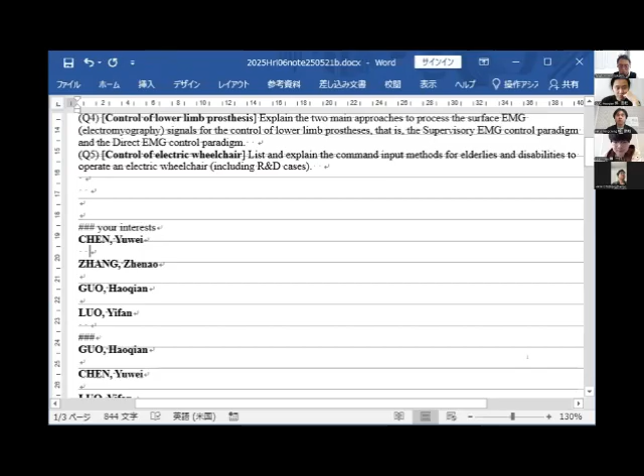Not only limited to these questions, but to which part of today's contents you are interested in - I want to hear from you first. So please answer which part of today's content or topic you are interested in.

I'm interested in learning - I'm interested in the lower limb prosthesis.

Why are you interested in this? Because it can help disabled people to activate their limb.

More details - which part are you interested in for the lower limb system: the mechanical part, the control part, the actuator part, or the sensing part? The direct EMG control.

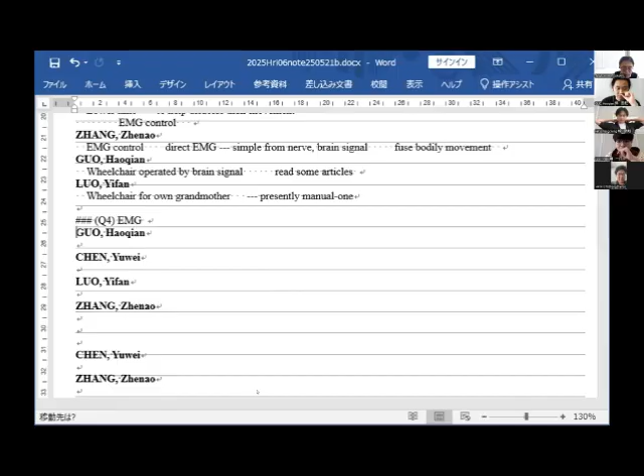Let me share my work. If it could be seen — because the computer doesn't have power, I have to use my cell phone to share instead. Here's question four.

Firstly, the supervisory EMG control. This is just like we need a kind of signal that makes a start or stop, and the control of the prosthetics as a kind of robotics system could work by itself. So this is called supervisory — it doesn't mean you need to control the actual exact movement itself. Your nerve signal is just there to give a signal that says start or stop.

A basic example is the autogenous bionic prosthetic knee. Its advantages are that it reduces user cognition and muscular workload, enables stable and safe gait in structured environments, and is well suited for users with limited residual muscle control. It's fairly useful for people who don't have the ability to export nerve information.

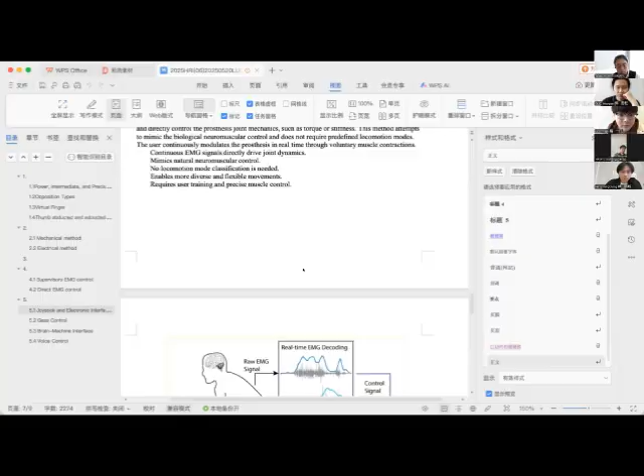The features of this control mode are: continuous EMG signals directly drive joint dynamics, mimicking natural neuromuscular control. No locomotion mode classification is needed, enabling more diverse and flexible movements, and it requires user training and precise muscle control.

So yeah, I don't know.

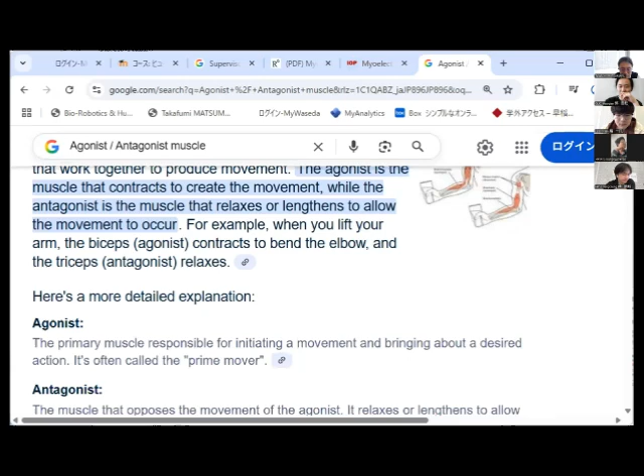How do you think? Do you know what we should say at the beginning to explain about this kind of agonist muscle, antagonist muscle? Agonist muscles, um, I think we should start from the human body structure because it is the muscle of the human, and what's the word?

Maybe I think this word maybe comes from anatomical. So maybe we can firstly start from some knowledge of the anatomical. I think it may be a good idea.

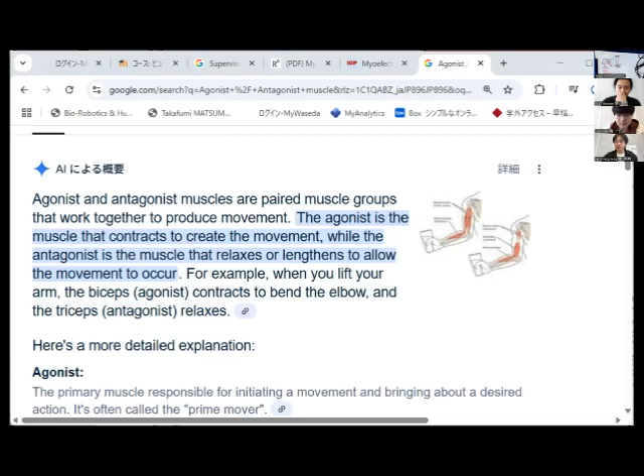Explain two main approaches to process the surface EMG signals for the control of lower limb prosthesis. Supervisory EMG control paradigm: in supervisory EMG control, EMG signals and gait events are used to classify the user's locomotion mode. The classifier's decision determines transition between the predefined finite states, and thus the specific low-level control of prosthesis operation associated with the identified locomotion mode.

The direct EMG control paradigm: in direct EMG control, the magnitude of EMG signals recorded from residual muscles directly and continuously modulates the prosthesis joint dynamics. Various control laws can be used to continuously map EMG activity to ankle control torque to drive prosthesis dynamics.

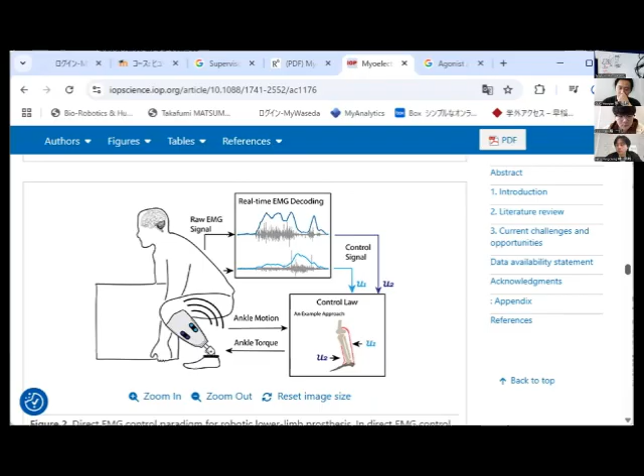Fine, thank you for your question. And...

Do you have more questions about the EMG signal control? Your part is your interest. He wants to know your question or your concerns or interest about the EMG control. Do you want to explain more? What is your intention, or do you want to talk more or not? No, I think that's enough. That's enough? Yeah.

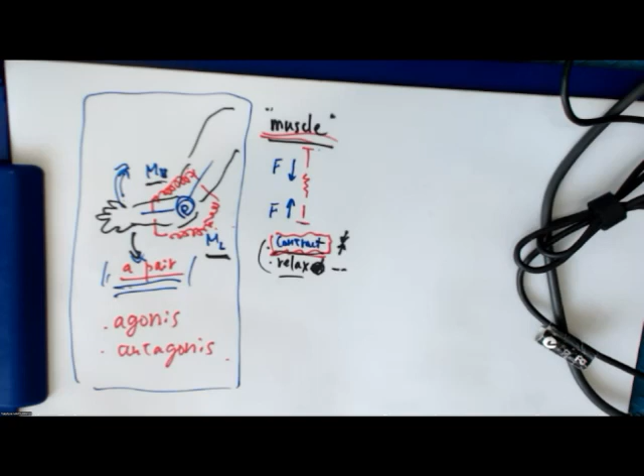When you have a long history of bad knees like me, jumping off a ledge with a 50-pound weight on your back is a surefire recipe for months of PT and crutches. But when you're wearing a military-grade robotic knee brace, theoretically, you should be okay. Moment of truth, I'm very nervous. I know. I'm Brent Rose, and I'm about to pay for my orthopedist's Hawaiian vacation. 3, 2, 1. Oh yeah baby, all day! Sweet. You're not going anywhere, Dr. Shapiro. Let's jump off a roof.

So you've heard about augmented reality, right? Well, how about augmented mobility? Robotic exoskeletons have captivated us for years. They're major tropes in sci-fi movies like Aliens, Elysium, and Avatar, but in real life, engineers have been working on them since the early 1900s, generally with terrible, clunky results.

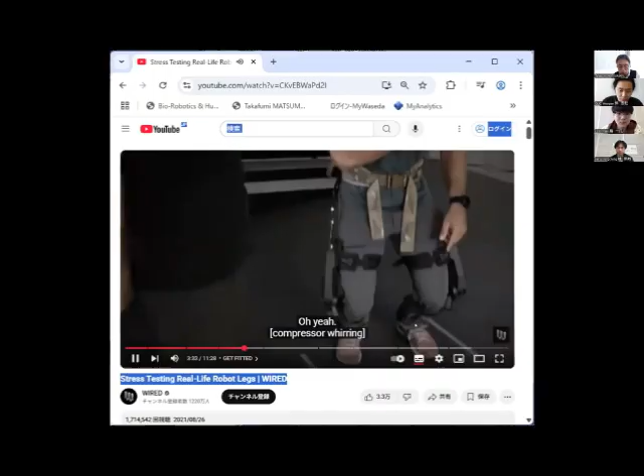Oh, yeah. Yeah, it's very springy. I couldn't help but notice that anytime I move, there's a bit of a noise coming out of it. What is that we're hearing? Yeah, so what you're hearing right now is the compressor itself charging up air to supply to each of the braces themselves. Part of what you're also hearing is when you move, there's the filling portion for the actuator, and then as you come back up, you'll hear venting. So some of that is both the brace sound and the power pack sound. Something we're working towards reducing, but that's what you're hearing, and that's what some of the vibrations are that you're feeling.

Okay, so we're going to start with a control test, and to do that we're going to do some squatting, which I haven't done in like 20 years. Normally you want to do this to failure. Failure for me, since I have a freshly tweaked knee, is going to be any inkling of pain, or just me passing out with a dumbbell on my head. All right, so this is 185. Let's see how this goes.

How red is my face right now? Whoa! Yep, we'll call it good. 4 is good.

Now I've got the forge on. We're going to turn it up to max support mode and see what we can do here. All right, it's okay to be scared. Here we go.

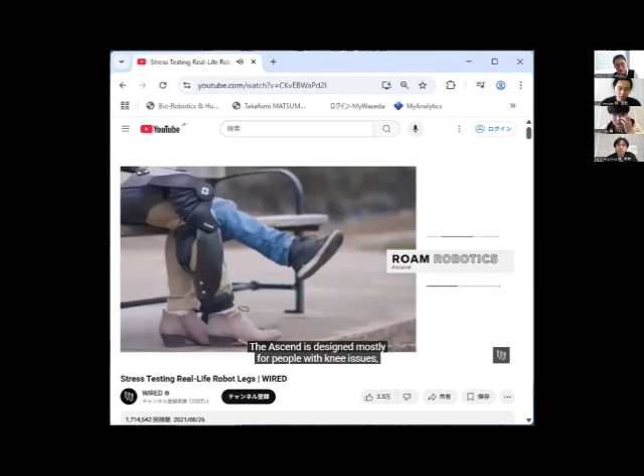It's worth noting that while we're just testing the Forge today, which is designed for these high-impact activities, Roam has two other models: the Ascend and the Elevate. The Ascend is designed mostly for people with knee issues, helping with standing, sitting, and going up and down stairs.

The Elevate is made for skiers whose knees aren't what they used to be. I actually got to test it in Big Sky, Montana a couple winters ago, and it did help me power through turns with less strain on my knees, though the sound of the air compressor in an otherwise tranquil place was pretty hard to ignore.

So the Forge did pretty well in the lab in some controlled testing. Let's try a little less controlled testing. They told me specifically that it will not help me dunk a basketball. We're gonna prove them wrong.

Perfect. All right, I'm all forged up now. Let's see if this improves my vertical at all.

No. Come on, baby, I cannot fly. I was wrong to believe that I could fly, and I feel stupid now. Okay, fine, so it was not designed for dunking.

Let's try a few things that it was designed for.

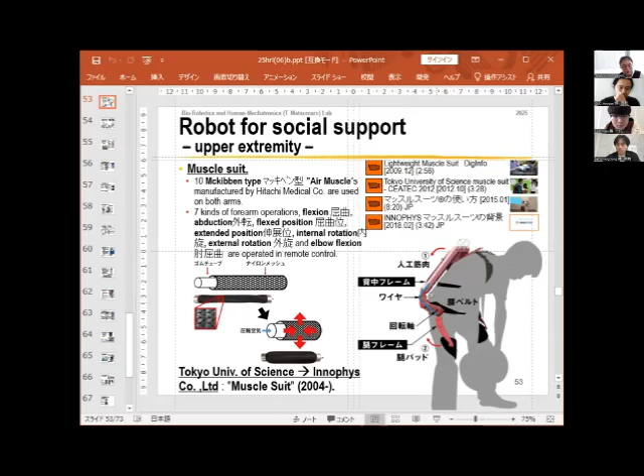Yes, good. Do you have some questions or do you want to discuss more about this part?

Well, we are hearing the question about EMG signal and control, and then we talked about it.

Yes, this is a main interesting paper, and this is one interesting video that we watched to see more practical usage of this.

Yes, this kind of knee supporting system - we don't know which kind of sensor is used.

Sometimes an EMG signal is used, sometimes it's only an acceleration sensor or some other sensor used to detect the situation or the user's intention.

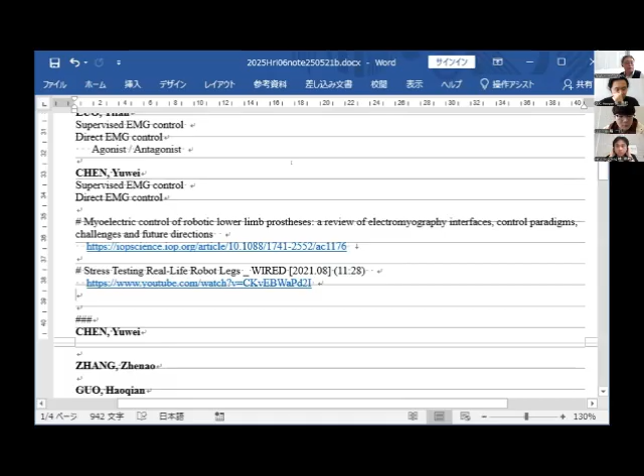So therefore, I have shown this video.

So, do you have any questions or comments? Or do we want to watch more or discuss more about this section?

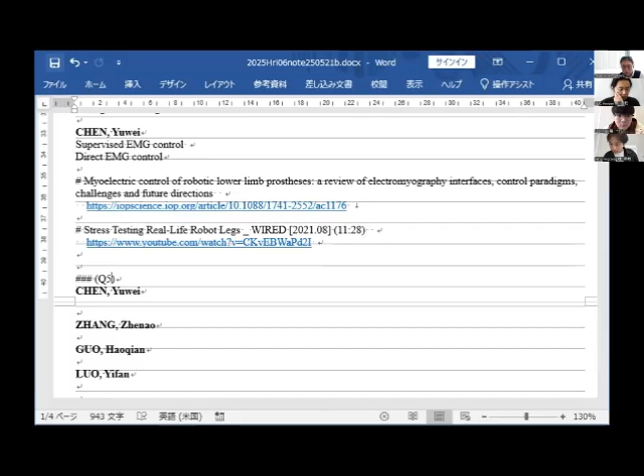Okay, this is my answer to question 5. This explains the common input methods for elderly and disabled users to operate an electric wheelchair.

The first is joystick control. It is the most prevalent method, where users manipulate a joystick to control direction and speed.

Firstly, the joystick translates physical movement into electric signals, and these signals are processed by a microcontroller, which interprets the input and sends commands to the wheelchair's motor controls.

And thirdly, advanced systems may include adaptive logic, algorithms that adjust sensitivity based on user strength and dexterity.

And the secondary method is the brain-computer interface.

It can be briefly called BCI. BCIs enable users to control wheelchairs using brain signals, benefiting those with severe motor impairments. First, electroencephalography captures brain activity, and then signal processing involves filtering, feature extraction, and classification algorithms to interpret users' intentions. Second, the commands are then relayed to the wheelchair's control system.

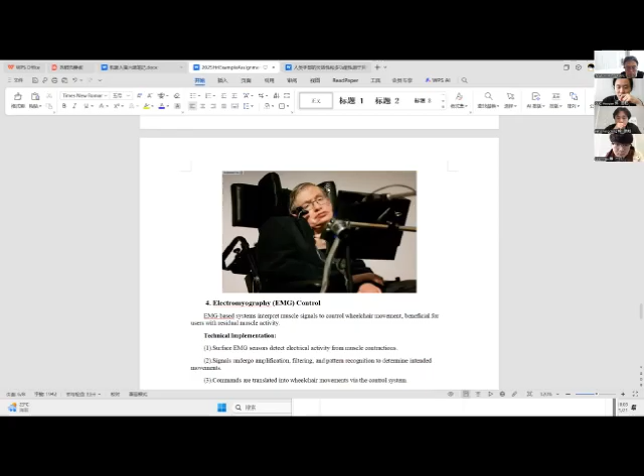Finally, there is electromyography control, briefly called EMG. EMG-based systems interpret muscle signals to control wheelchair movement, beneficial for users with residual muscle activity. First, surface EMG sensors detect electrical activity from muscle contractions, and then the signals undergo amplification, filtering, and pattern recognition to determine intended movement. Finally, the commands are translated into wheelchair movement by the control system, and so on.

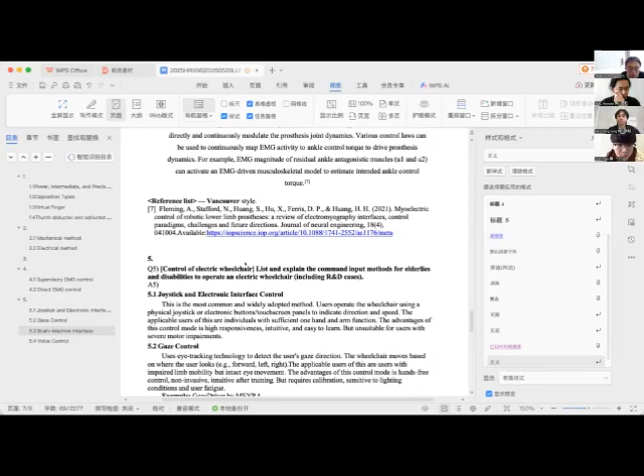First is the joystick and electronic interface control. This is the most common and widely adopted method. Users operate the wheelchair using a physical joystick or electronic buttons to indicate direction and speed. The applicable users are individuals with sufficient one-hand and arm function. The advantage of this control mode is high responsiveness, intuitiveness, and ease of learning, but it's unsuitable for users with severe motor impairment.

Second is gaze control. They use eye tracking technology to detect the user's gaze direction, and the wheelchair moves based on where the user looks. The advantage of this control mode is hands-free control and non-invasiveness, intuitive after training, but it requires calibration and is sensitive to lighting conditions and user fatigue. An example is GazeDriver by MEYRA.

Next is brain-machine interface control. Brain signals, typically using EEG, are decoded and used to control the wheelchair. This allows the user to operate the device by thought alone. The advantages of this control mode are no physical movement needed and high accessibility for severely disabled users, but it is still largely untested, requires a long training period, is costly, and prone to noise.

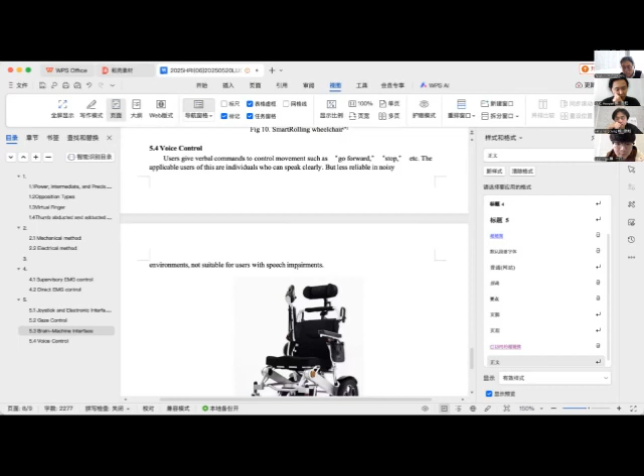In my opinion, unless a user has severely limited mobility, wheelchairs controlled by gaze, brain-machine interface, or voice may actually pose unnecessary risks for elderly individuals. For example, my grandmother cannot walk long distances, so she used to rely on a manual wheelchair, pushing herself daily to meet friends and play mahjong. Seeing that it was slow and physically exhausting, I bought her an electric wheelchair with joystick and button controls. However, after trying it once, she was frightened, felt she couldn't operate it properly, and was afraid of crashing or falling. As a result, she went back to using her manual wheelchair.

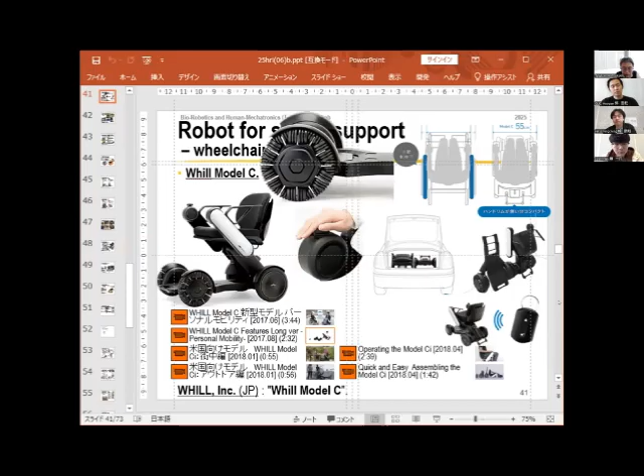What you haven't said is maybe - in this material I have also provided some examples, like gaze eye movement control, which was also tested more than 10 years ago, and many other researchers try to do gaze control, and also BMI control, brainwave control, made by various kinds.

I recently mentioned gaze because autonomous driving makes gaze control different and new these days. It means that we didn't use the gaze to input how we move - we just use the gaze to input the location that we need to move to. So this is the most interesting thing, that nowadays gaze has become a topic again.

You have some opinion? Okay, now, gaze control.

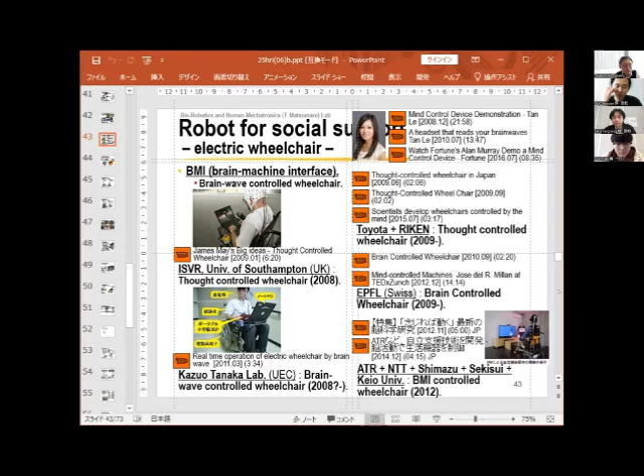When we say gaze control, there's tentative direction control - the gaze direction shows forward, right, and left, we can decide. But of course, gaze's meaning could also be a goal point - pointing to the goal is also one way. So this is definitely a way toward nowadays gaze control. This is very interesting, that the most traditional method is becoming a definitely new one.

Okay, good. And also this is brain - a brain signal control. And the product presently produced by a US company, I will show some video.

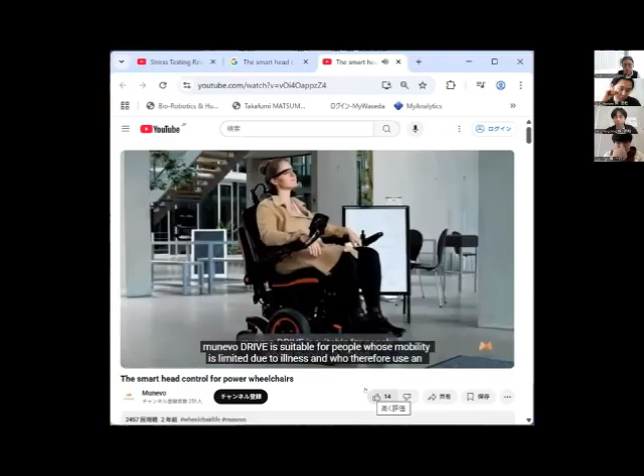In addition to controlling wheelchairs, drivers can use smartphones and apps to take photos and much more. munevo DRIVE is suitable for people whose mobility is limited due to illness and who therefore use an electric wheelchair. To use munevo DRIVE, you must be able to nod and tilt your head within a range of about 1.5 inches in each direction only.

Our technology allows people to continue to control their wheelchairs safely and intuitively, even with minimal head movements, for more freedom and mobility in everyday life. munevo DRIVE has been approved as a medical device since 2018 in Germany.

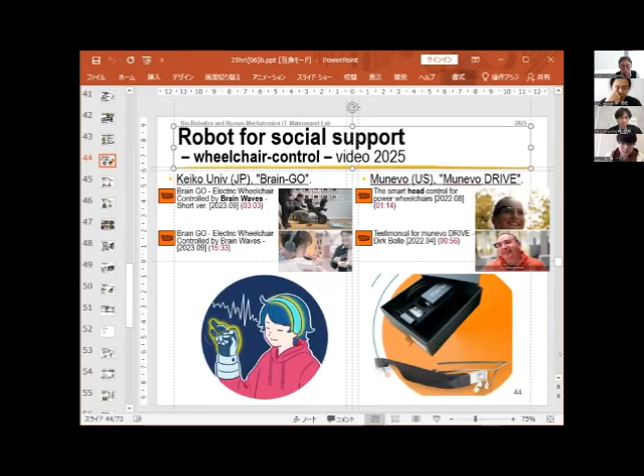This head movement control is one way, but it can also be slightly unstable in some cases. So some calibration has been made, and personalization is also done using some machine learning technology or something. But whether it is good or not, I don't know exactly, and I don't know the user's feeling about it.

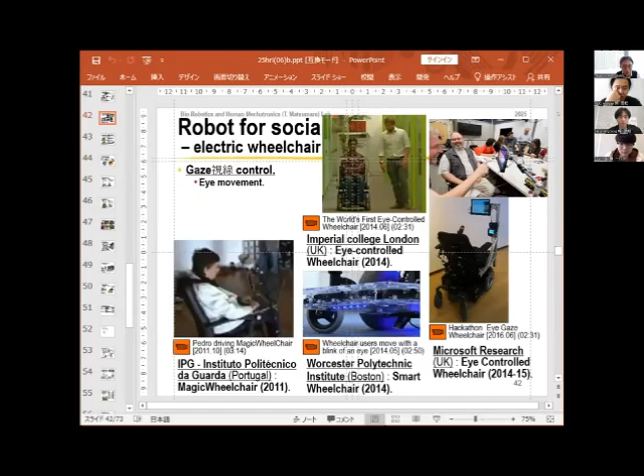Hi, this is kind of the wheelchair control part. Do you have some questions or comments, or want to discuss more about it? Nothing? Okay, how should I proceed. Less than 10 minutes left.

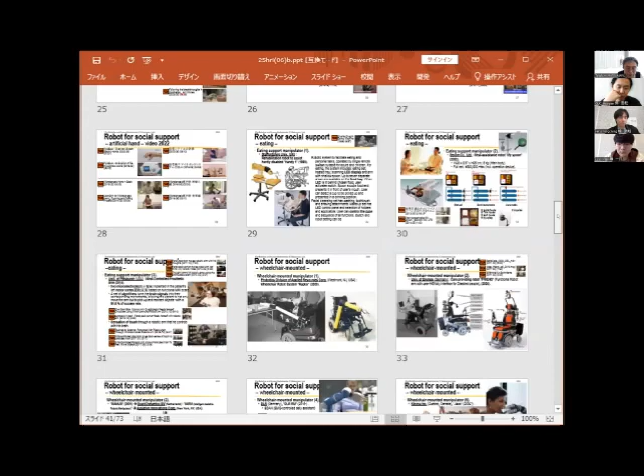So, hand prostheses are not so much interesting.

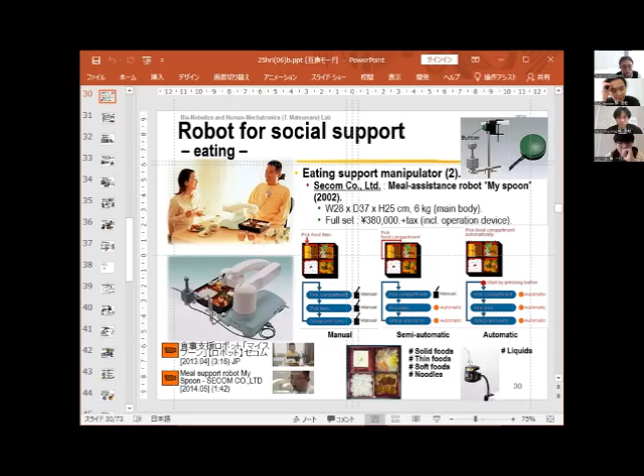Eating support is the topic here - a mind control processing arm, this wheelchair mounted arm control. Starting from eating support, the wheelchair mounted arm is developed, and this is about 10 years ago, the electrode is directly attached, implanted inside the head.

So the brain signal is detected directly by the electrode. The brain signal is directly detected by something, and then the manipulator can be controlled by the brain signal directly. This technology first started about 10 years ago.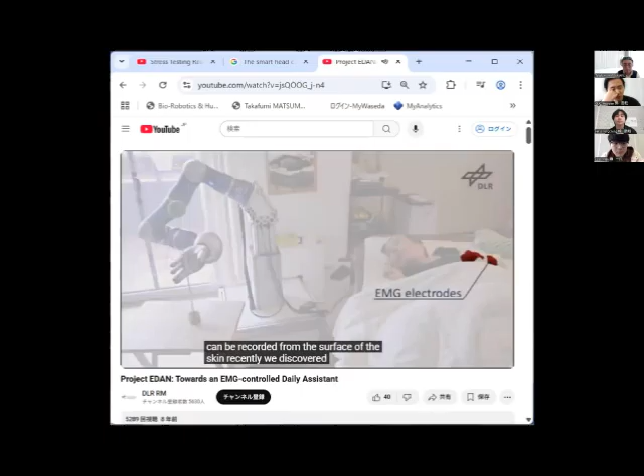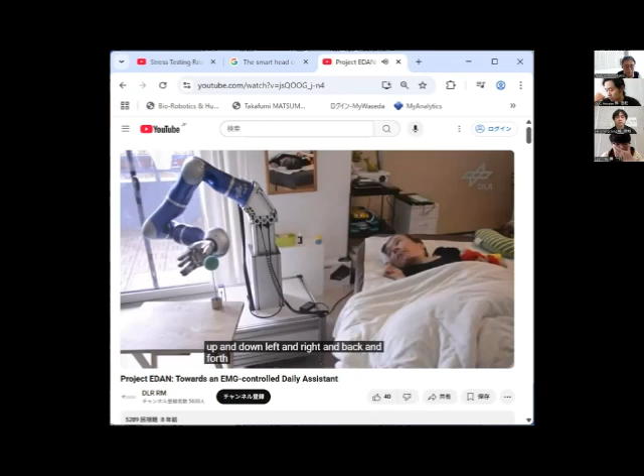Control of such a robotic device can also be accomplished using measurements of muscular activity. These EMG signals can be recorded from the surface of the skin. Recently, we discovered that even people with severe muscular atrophy can use this kind of interface. Similar to a joystick, they can move the robotic arm up and down, left and right, and back and forth. As with the BrainGate interface, EMG-based commands allow a person to perform simple predefined tasks. While such an interface can be tricky to use and requires some level of concentration, it presents a first step towards an independent lifestyle for the user.

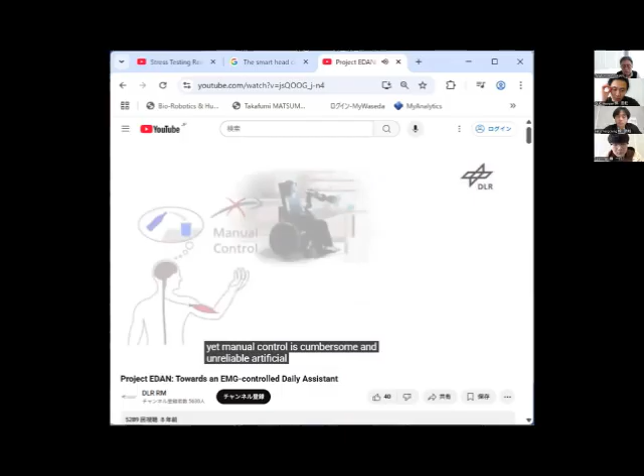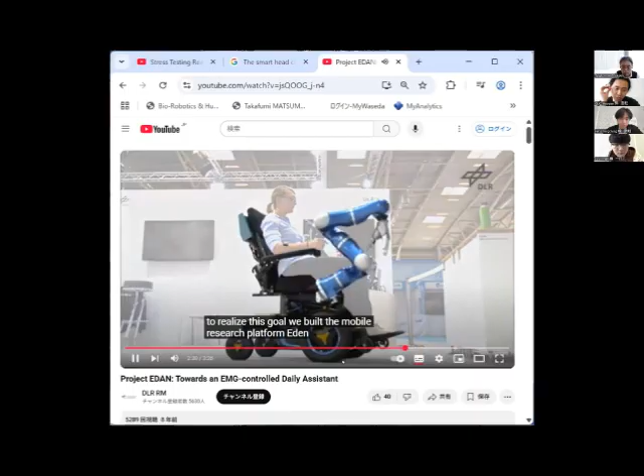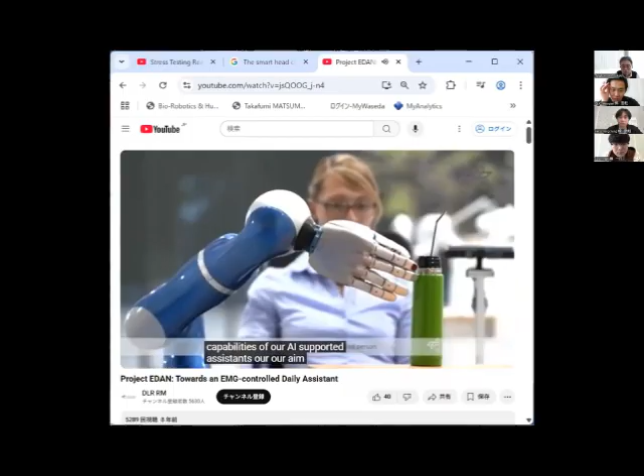Yet, manual control is cumbersome and unreliable. Artificial intelligence can help overcome these issues. Machine learning and cognitive reasoning methods are utilized to autonomously infer the user's intention and support task execution accordingly. To realize this goal, we built the mobile research platform EDAN. Using EDAN, we will continuously increase the capabilities of our AI-supported assistants. Our aim is to provide people with disabilities with an intelligent assistive device to perform usual daily activities such as opening doors or pouring water. Finally, our research will one day help people with physical disabilities to live more independent lives.

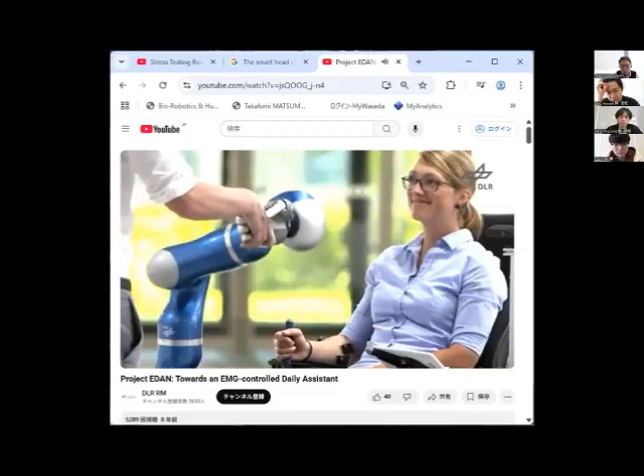This is a project promotion video, so the goal is the realization of this kind of scene, using the EMG signal or the brain signal. This kind of project has been done and is being done in many countries - this kind of EMG control daily assistance system, and so on.